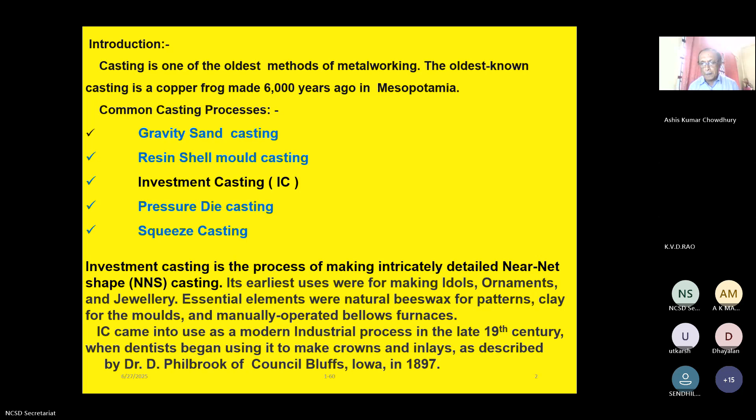During World War II, around 1940, there was increased demand for precision components of specialized alloys that could not be shaped through traditional processes. Industries turned to the investment casting process to manufacture these in large volumes in near net shape form.

Today it is one of the most important technologies for manufacturing components for aerospace, defense, and medical sectors. Industry has already taken up the help of CNC machining, robotics, computer technology, and counter-gravity techniques to achieve the strict acceptance criteria of finished casting components for these sectors.

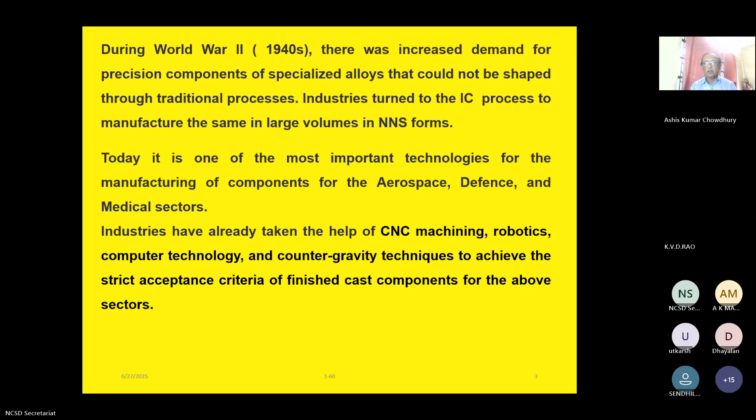Modern industry nowadays demands two main things: high quality, complex geometry engineering components at an affordable price within a reasonable delivery schedule; and number two, in case of new products, the industry should be capable of delivering the prototype component as quickly as possible.

Some of the engineering components being manufactured through the investment casting process for different applications are as follows: orthopedic implants for knee joints, small gears for ordinary machines, triggers for firearms, and turbine blades for aerospace engines.

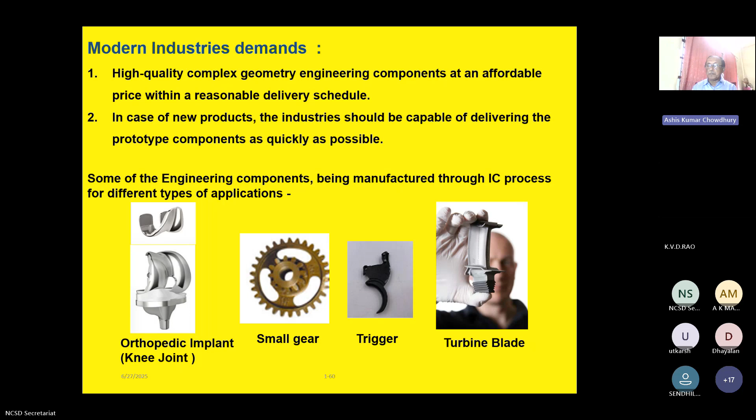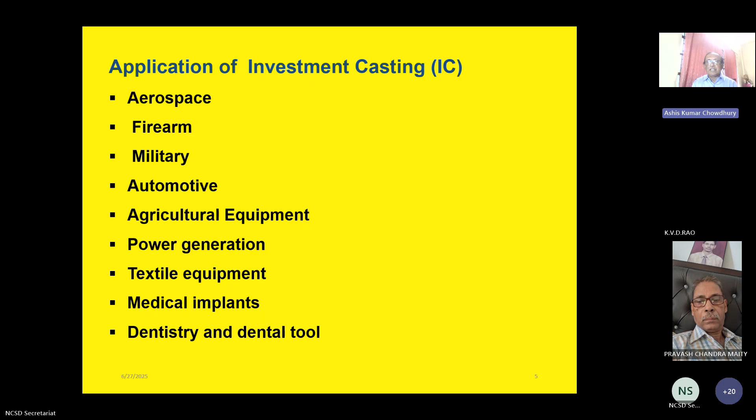There are a lot of advantages of the investment casting process. Some of them are: easy to cast complex geometry components in large volume; number two, provides excellent dimensional accuracy of plus minus 0.05; a wide range of alloys can be processed.

Excellent surface finish, easy to cast thin wall parts, low wastage of raw material, suitable for high melting point alloys as well as difficult to machine alloys. Easy to achieve low level of inclusion content under vacuum melting and casting route, suitable to produce near net shape components.

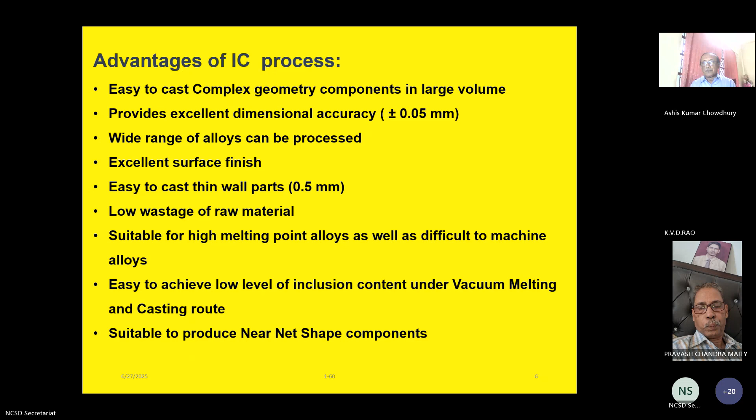Now, when to select this investment casting process? The designer will select it when complex geometry components having tight tolerances, parts are non-symmetrical with fine details, intricate internal passages in design, excellent as-cast surface finish is required, wall thickness is too thin for sand casting.

Machining of internal passages is not possible, alloy is difficult to machine or process through other routes, high upfront tooling cost relative to sand cast are acceptable, or there is high volume of production.

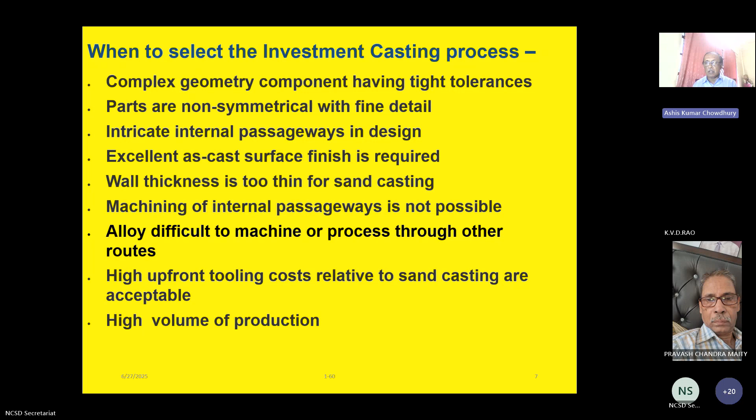The broad outline of investment casting: die making, wax injection, wax assembly to make a tree, followed by slurry coating, followed by stuccoing, repetition of stages 4 and 5 till achieving 6 to 7 layers of thickness, de-waxing to remove the wax, then melting and casting, followed by shell removal, cutting of the component, finishing, and inspection.

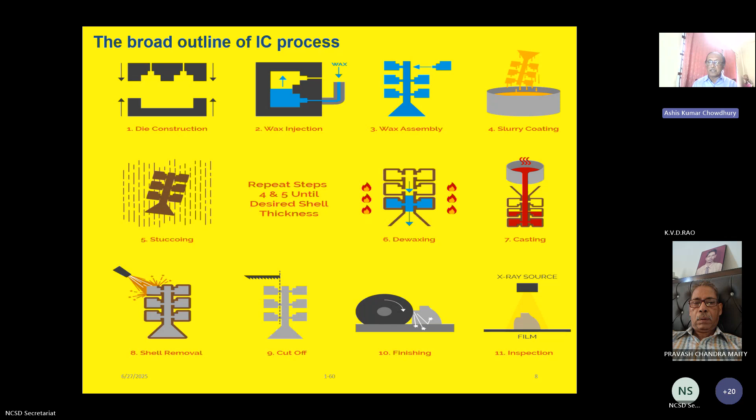Important steps of investment casting are: first, analysis of drawing and development of solid model, simulation of the investment casting process, 3D model of wax pattern and ceramic core, die assembly, manufacturing of die assembly for pattern and core, then wax pattern and ceramic core, assembly of pattern with sprue to form tree, preparation of ceramic shell, dewaxing, drying and sintering of mold, melting of alloy and investment casting of component, fettling of cast component, inspection and testing of cast component, machining and heat treatment of final parts.

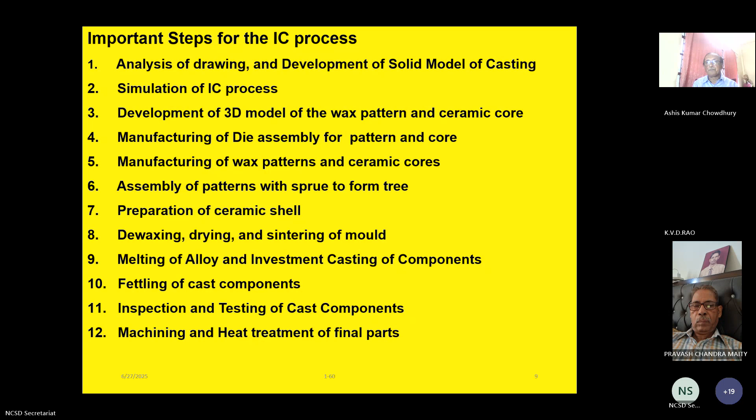Now in detail, I am going through each step of the investment casting process. First, after receiving the drawing and technical specification, the methoding department will analyze alloy specification and melting procedure, whether it is air melting or vacuum melting, dimensional tolerance and dimension, and surface finish. Accordingly, other things will be finalized.

Inspection standard, DT and NDT, and defect acceptance criteria at different zones of the component - that is a very important thing in today's world. Once it has been defined, the next stage is development of a solid model through computer of the as-cast part.

Incorporate the following in the solid model: complex hollow passages of the cast part, shrinkage allowances, and machining allowances wherever applicable. Create the solid model of the as-cast part and the tree assembly.

Initial simulation trial of the solid model using data from the library. The findings show the shape, size, distribution, and location of the defects of the casting.

To eliminate the defects, run more iterations for different cluster assemblies using operating parameters like pouring temperature, mold temperature, pouring time, cooling rate, air cooling or slow cooling, and number of nodes and density of the casting. One thing to always keep in mind: the number of nodes is very crucial to run this simulation. If the number of nodes is more, your computer time will be more. On the other hand, if the number of nodes is more, you will be able to detect very fine defects.

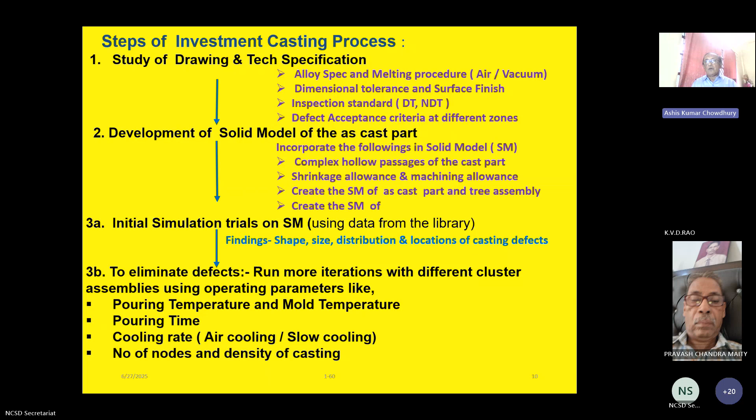Now I'll show you two diagrams of simulations. One is on the left-hand side, where there are small components assembled in a cluster on a tree. In the first row it's 4, second is 3, and last one is 2. It is showing the solidification sequence of the component with respect to the main reservoir of the pouring basin.

The red color shows liquid metal temperature. Green and blue show the solidification sequence. On the right-hand side is the assembly of turbine blades, stator turbine blades of a jet engine, with assembly on a single sprue supplied by two runners, one on top and another on the bottom. It is also showing the sequence of solidification.

After the solidification time is over, the methoding department should carry out the slicing operation to check whether any defect is there or not, and if so, what is the size and location. Then, in order to eliminate it, they have to run the simulation trial a number of times. Generally, to achieve the target, it takes 7 to 10 days to overcome these defects.

The outcome of the computerized simulation is the final geometry of the quality casting, geometry of the pattern, runner, ingate and their position, mold temperature, pouring temperature, pouring time, solidification time, and cooling characteristics.

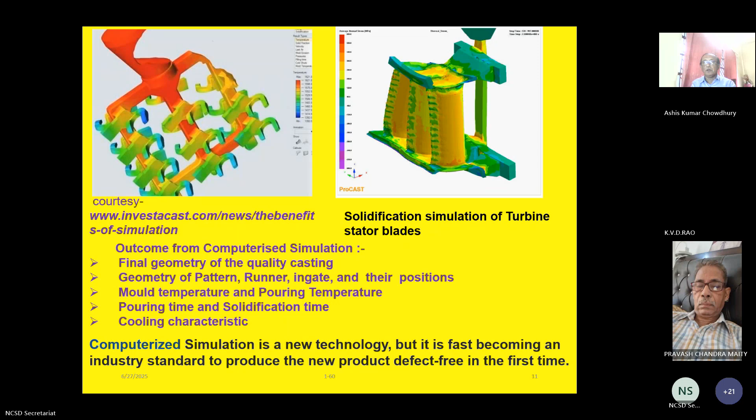Next is manufacturing of the die. Die for wax pattern — the solid model of the pattern will give you the data. One way we can manufacture it is through conventional machining or CNC machining. Otherwise, if it is a new product, we can go through an RP model component and then a silicon rubber mold for manufacturing a limited number of patterns, the RP patterns.

Type B is the die for manufacturing of the core. The contour of the hollow passages of the cast component is digitized from the solid model, transferred to the CNC machine, and then the metallic die is manufactured through the CNC machine. Templates and gauges are used for periodic inspection of the die contour.

The materials used for manufacturing the die assembly for pattern and ceramic core include steel, aluminum, beryllium-copper, rubber, and plastic. Soft metal tooling and non-metallic tooling like RP are primarily used for prototype development.

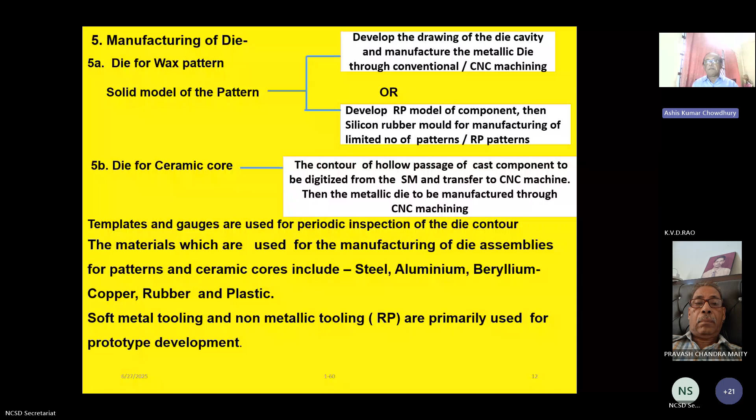After manufacturing of the die, you have to do the inspection. The die assembly has to be inspected for dimensional accuracy and profile by CMM. All working surfaces of the die cavity should be highlighted and highly polished.

Desired surface finish is to be achieved by polishing and lapping. Sharp corners are to be eliminated for easy ejection of the pattern and cores.

Trial runs are carried out with the die assembly to assess its performance for manufacturing the wax pattern and ceramic core, if necessary, before initiating final production. During regular production, periodic inspection of the die cavity has to be carried out with different types of tools and gauges.

Manufacturing of pattern.

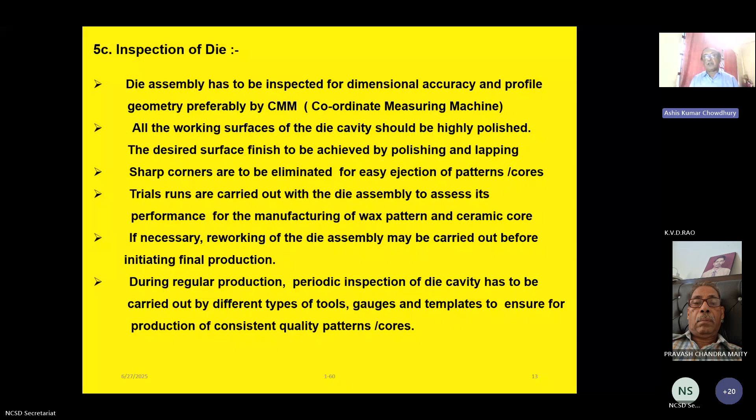Complicated shapes with close tolerance and intricate core configuration demand the use of specific type of pattern material that should have the ability to reproduce fine details as well as be easily removed from the ceramic shell. Waxes are mostly the preferred material for patterns and are normally used modified, blended with additive materials in order to improve their properties.

The following waxes are most used: paraffin wax, having a melting point of 52 to 68, and microcrystalline wax, having a melting point of 63 to 93. Paraffin wax has low cost, high lubricity, and low viscosity. Microcrystalline wax, both hard, non-tacky grades as well as soft grades, tends to be highly plastic and provides toughness to the wax blend. Paraffin and microcrystalline wax are the most widely used waxes and are often used in combination because their properties tend to be complementary.

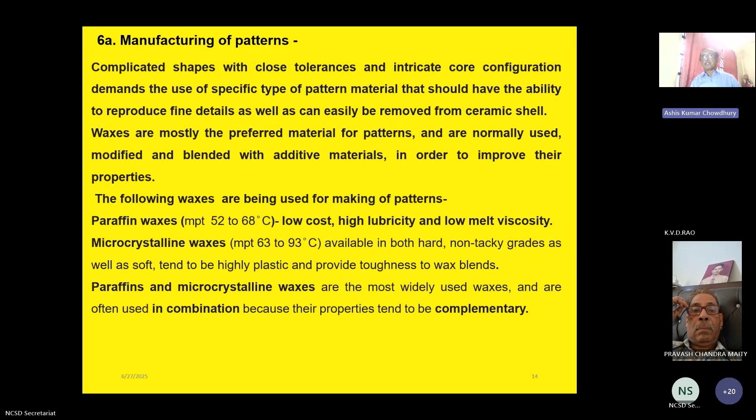The tank of an injection press holds the liquid wax and is constantly agitated to ensure a homogeneous mixture. A hydraulic cylinder moves the liquid wax into the injection cylinder to prepare for injection. Once the die is closed, another hydraulic cylinder pushes the wax through the heated hose and into the die via the injection sprue, filling the cavity and allowing the wax to solidify inside. Once solidified, the wax patterns are removed from the tool.

Process parameters for making patterns: wax temperature, nozzle temperature, injection pressure, flow rate, and dwell time.

A gate is left in the pattern which serves as the connection point for the wax runner in the next step of the process. At this point, wax patterns are now ready to move for assembly with the sprue. Wax has a low melting point and low viscosity, which makes it easy to blend, inject, assemble into a cluster, and melt out without cracking the thin ceramic shell mold.

Other pattern materials are plastic. A general purpose grade of polystyrene is usually used for production of components in large volume.

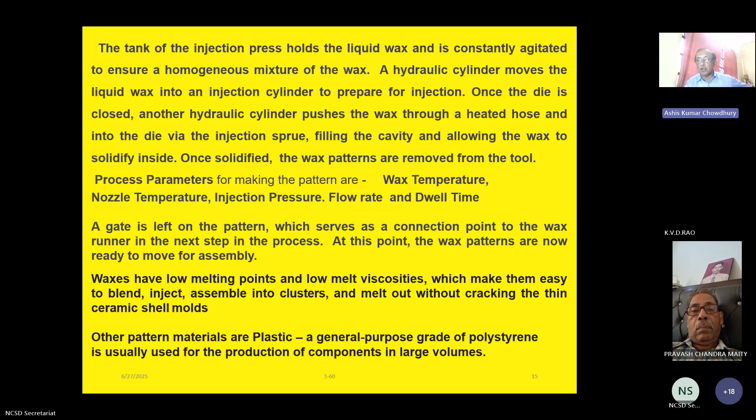Points to be considered for selecting a pattern material: strength, fluidity, low ash content, compatibility with ceramic shell and core, dimensional stability with minimum dimensional distortion during storage as well as during preparation of the ceramic mold, shelf life with longer storage life, and miscellaneous factors such as initial cost and availability.

Pattern through RP. This is another way of making it. Advanced techniques have been developed currently to produce prototypes when only a few patterns are required.

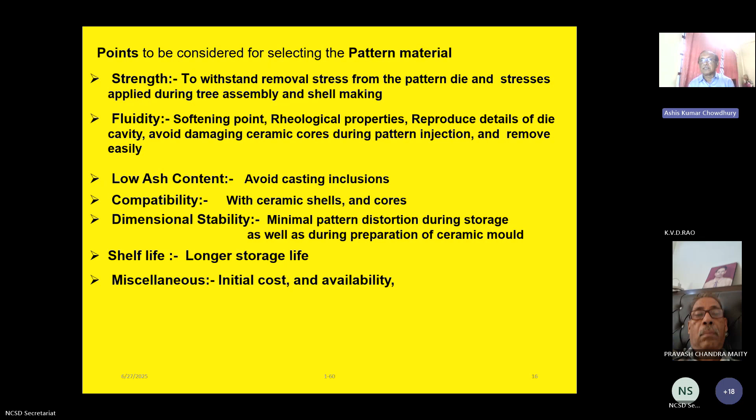For such limited use of patterns, rapid prototype patterns are being produced in machines utilizing advanced techniques such as SLS, selective laser sintering, and SLA, stereolithography, with the help of special polymers called photopolymers. These techniques are also known as...

3D printing produces prototype patterns by building parts through depositing fine layers of various materials, using laser only when necessary to achieve the finished shape as defined by CAD. These patterns have been found to have a favorable dewaxing response, resulting in substantially improved surface quality for investment casting prototypes in many alloys. Prototype ceramic cores are also being manufactured through the RP route from 3D solid models.

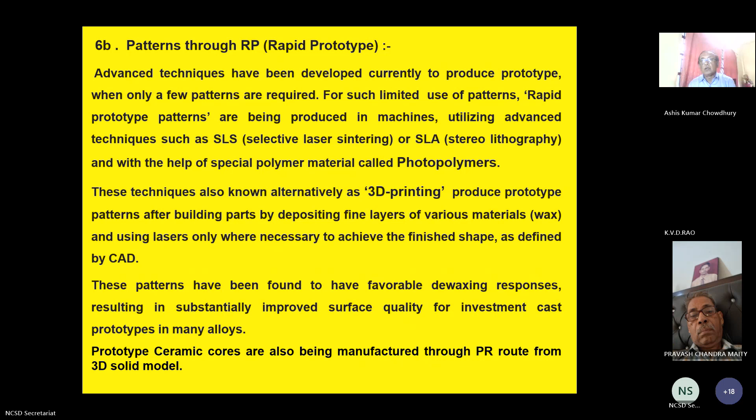Manufacturing of ceramic core. Ceramic cores are widely used in investment casting to produce intricate internal passages in the casting. Ceramic cores must have the following characteristics: enough strength to withstand the forces of wax injection, excellent thermal shock resistance to withstand thermal stresses, high refractoriness value to retain geometry during the entire process, chemical compatibility with the cast alloy, and easy removability from the casting.

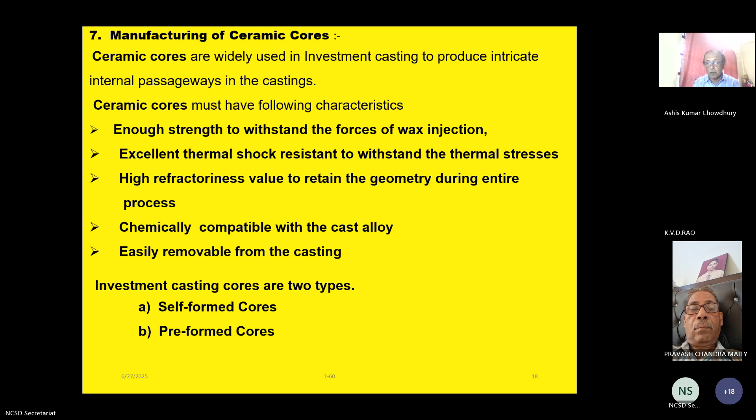Investment casting cores are of two types: self-formed cores and pre-formed cores. Self-formed cores require that the wax pattern already have a clear opening corresponding to the passageway desired for casting. For simple shapes, this is achieved by using metal inserts or pull cores in the pattern tooling before injecting the pattern material.

The first example is a wax pattern with a self-formed core, and the second is a cluster produced from the same pattern, as shown. For complex geometry where pulling of an insert is difficult, soluble cores are placed in the tooling, and then wax is injected to make the desired pattern.

Soluble cores are generally made from solid polyethylene glycol with a powdered filler such as sodium bicarbonate or calcium carbonate. The filler can be dissolved in an aqueous solution, such as citric acid, with vigorous gas evolution providing the agitation to speed up the dissolution process.

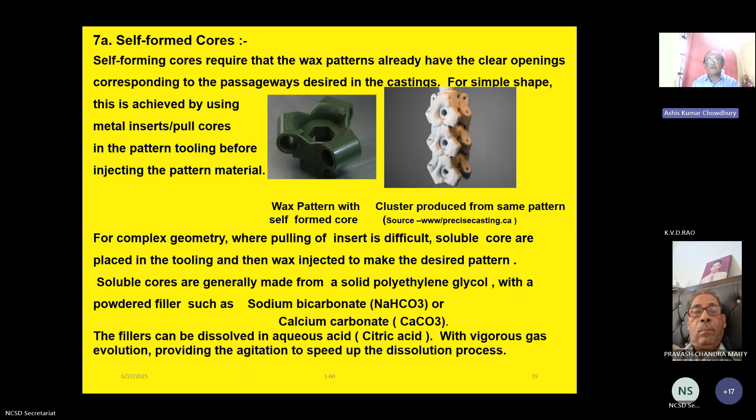The second one is preformed cores. Preformed cores are required when self-formed cores cannot be used. Simple tubes or rods are commonly extruded from silica glass. Many cores are made by injection molding of fine ceramic powder, fused silica, and sometimes with addition of zircon, with a suitable organic binder like thermoplastic material such as polyethylene or ethyl cellulose, into a steel die, subjecting the cores to two stages of heat treatment. In the first stage, the thermoplastic binder is slowly removed from the cores without disturbing the core geometry. This is a very crucial technique. In the second stage, the core is sintered at high temperature to achieve its final strength and dimension.

Preformed cores are normally used by placing the pattern die and injecting wax around them. Since core expands differently than shell mold due to their difference in composition, core must be provided with slip joint in the mold. Dimension of core print and dimension of seat should perfectly match, leaving no gap in between. Displacement or breakage of the core has to be prevented during injection of pattern as well as during casting process, otherwise casting will be defective. In order to ascertain the dimension, it is easy to measure the gap between the wall of the core and die cavity with the help of a template or gauge. This has to be performed after placement of core inside the die cavity.

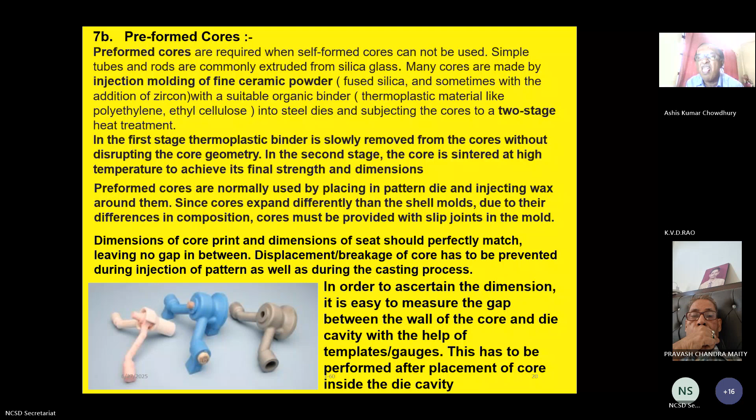Cleaning of pattern: current foundry practices for cleaning and etching wax pattern for removal of silicone oil or any other releasing agent before the primary ceramic coat is applied includes use of citrus-based solvent, detergent emulsion, or a mixture of both. Otherwise, if we are not removing the greases and silicone oil, it will be difficult to carry out the shell making. Pattern washes of this type have replaced The dangerous low flash point solvents which were earlier used, like spirit, acetone, toluene, xylene, have been replaced by current formulations of water-based solutions, which are dilutable, with deionized water, and recyclable.

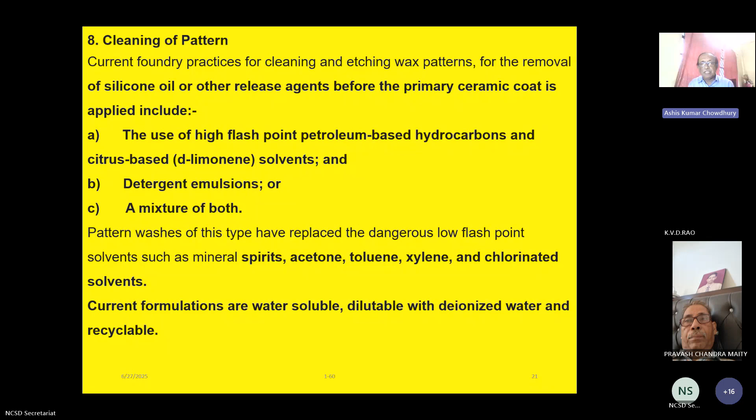These are more useful and easy to operate. After washing or blowing off, often with air, the solvent is left to evaporate clear. The effectiveness of the cleanliness of the pattern surface has to be inspected by carrying out a test: dip a clean wax bar or pattern into primary binder slurry to its midpoint, remove the binder and observe the surface. Good wetting indicators would be uniform coating with no slurry break. Poor wetting indicators include slurry breaks and forms holes.

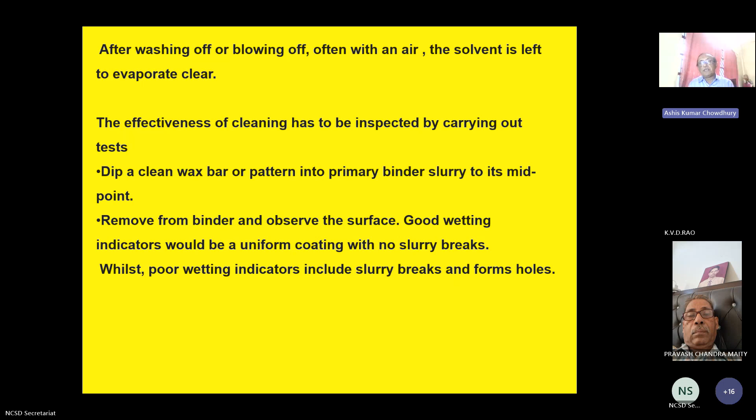Now next is runner design. Runners distribute the liquid metal to optimize the metal supply mechanism. It guides the liquid flow to fill the targeted product cavity. Also, it allows multiple metal delivery channels, which enables a mold to hold multiple product cavities. This adds economical value to foundry practices. Adding more parallel runners can also help facilitate better metal filling in complex or heavy parts. Size of runner also influences the feeding rate into the ingate, which later relates to the feeding rate into the product cavity.

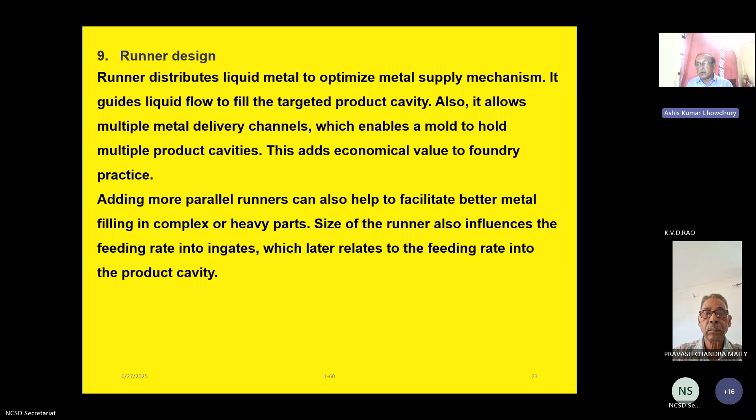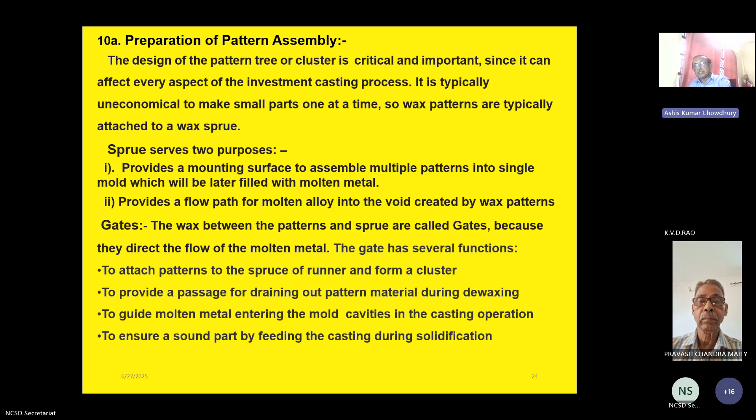Here I have given the photograph of two examples. This is a typical small component. The first one is the solid model of a small component. The next figure is the solid model of the component with ingate, shown in red color. In the next photograph, all these components - 12 components, left hand side 6, right hand side 6 - are shown with a central sprue, and at the top of it is a pouring cup. The bottom is feeder extension; this is the height of the feeder. The right hand, extreme right, indicates the location of the runner.

The entire cluster has 36 parts. Since this is small, this system can take 36 parts in one time for one casting. So this has to be decided by experience, how many parts have to be assembled in the tree. If the height of the feeder is more, then two factors come into picture: one is the weight of the entire system will be very high, including the weight of the shell mold.

If the height is increasing, there is a tendency of turbulence at the bottom of the mold. This is not desirable because it will erode the shell layer, so there has to be an optimized design factor.

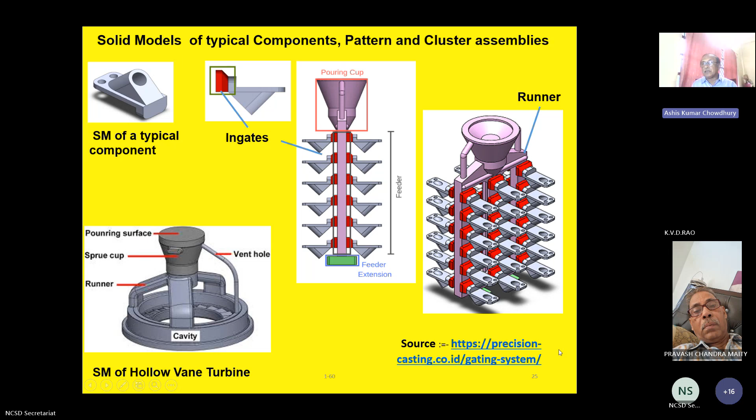Large patterns are set up and processed individually, but small and medium ones are assembled into a multiple pattern cluster for economy of processing. Most patterns are injected complete, including the ingate. However, complex parts can be injected in segments which are assembled into final form.

Gating components, including pour cups, are produced separately. Patterns and gating components are assembled to produce the pattern cluster. Preformed ceramic cups are often used in place of wax ones. Assembly of all parts is done manually.

Wax components are assembled by wax welding using a hot iron or spatula or small gas flame. Wax at the interface is quickly melted and components are pressed together until the wax solidifies. Joints are smoothed over; subsequently, the radius of the corner has to be filled up with wax.

Patterns must be properly spaced and aligned. Joints must be strong and completely sealed with no undercut.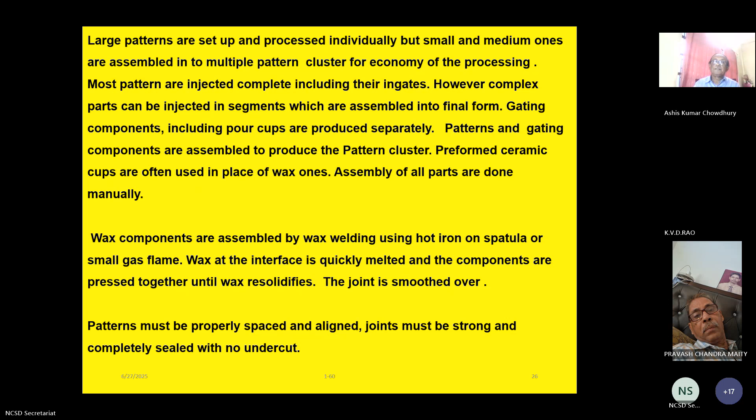Polystyrene patterns can be assembled by welding, using a solvent such as methyl ethyl ketone. The plastic at the interface is softened by the solvent and parts are pressed together until bonded. Assembly of polystyrene to wax is done by welding with only the wax being melted.

Cluster design: factors to be considered for designing of pattern cluster are ease of assembly, number of pieces to be assembled, handling strength, ease of mold form and drying, flow of liquid metal, feeding of shrinkage, fettling, and available infrastructure. The size of the furnace is also a big factor.

Three requirements are essential: providing a cluster that is properly sized and strong enough to be handled throughout the process, meeting the metallurgical requirement of the component, and casting of separate test specimens for chemical and mechanical tests. Once these essentials are satisfied, other factors are adjusted to maximize profitability.

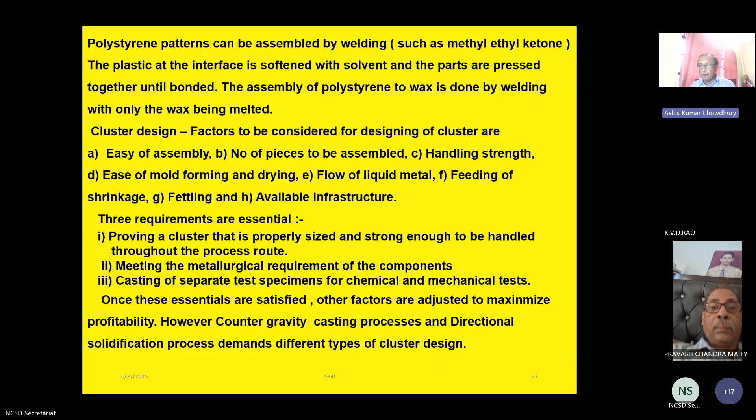However, countergravity casting process and directional solidification process demand different types of cluster design.

Pouring cup: it collects the poured liquid metal and facilitates metal flow into the mold. It is the liquid metal entrance into the mold. In investment casting, it also acts as a reservoir to supply extra metal if required.

Proper gating system design can also trap slag, dross, and inclusions from entering the product cavity. Light inclusions float to the pouring cup given enough time due to lower density compared to liquid metal. They may be present in the melt or form during pouring. Reoxidation is the most frequent origin of inclusion. Some inclusions can also originate from melting and casting equipment, from the furnace and ladle, even from mold debris. This has to be carefully handled.

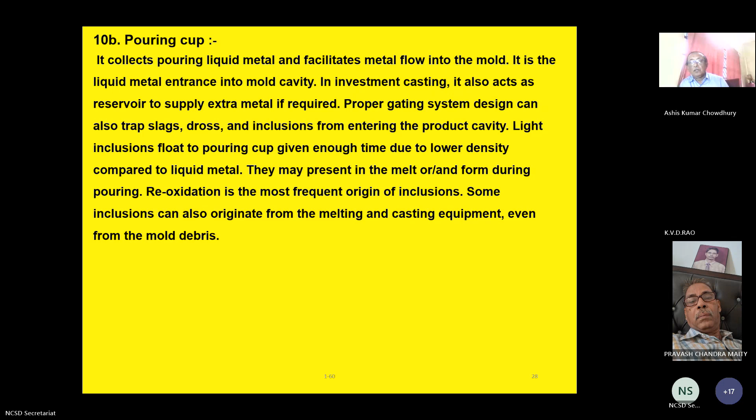Ceramic shell molds are made by applying a series of ceramic coatings on the pattern cluster. Each ceramic shell consists of 7 to 10 layers of ceramic particle layer. The most common refractory materials used for ceramic shell molds are silica, zircon, and various aluminum silicates, composed of mullite and free silica. Alumina is used for production of superalloy castings.

Silica is used in the form of silica glass. Its extremely low coefficient of thermal expansion imparts thermal shock resistance to the mold, and it is readily soluble in molten caustic soda. The caustic solution provides a means of removing shell material chemically from inaccessible areas of the casting that are difficult to clean by other methods.

Zircon occurs naturally as sand and is used in the form of stucco. It is generally limited in use; it does not occur in the higher sizes required for the backup coat. It is sometimes used with silica and/or aluminum silicate. Its advantages are high refractoriness, resistance to wetting by molten metal, round particle shape, and availability. That is why the first coat of the shell is made by zircon powder.

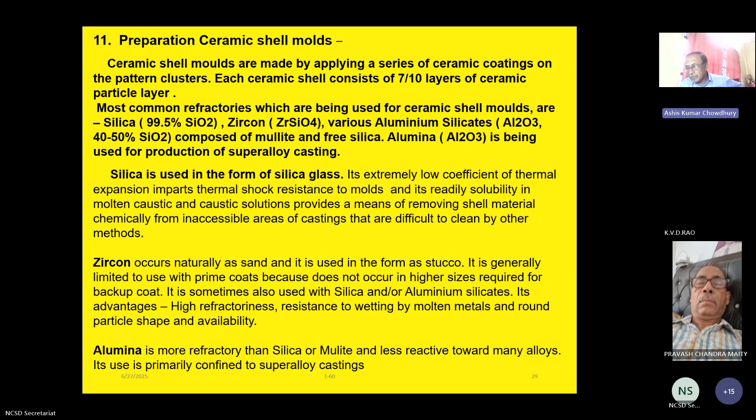Selection of shell material is dependent on a number of parameters such as type of alloy, temperature of pouring, casting process, and availability and cost. Some typical refractory materials and their maximum use temperature are: alumina can be used up to 1840 degrees centigrade, silica 1680 degrees centigrade, zircon up to 1650 degrees centigrade, aluminosilicate 1560 degrees centigrade.

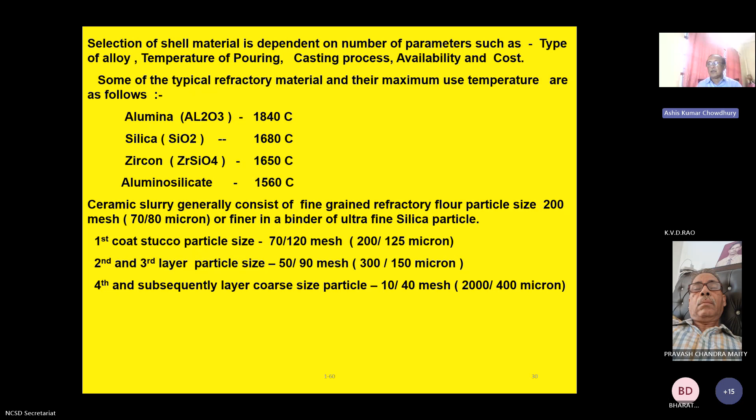Ceramic slurry generally consists of fine-grained refractory flour, particle size 200 mesh, that means 70 to 80 micron, or finer, in a binder of ultra-fine silica particles. The first particle layer is 70 to 120 mesh, 125 to 200 micron. The second and third layers are 50 to 90 mesh. The fourth and subsequent layers have a particle size of 10 to 40 mesh.

Slurry is prepared by adding refractory powder to the binder liquid, using agitation to break agglomeration, remove any air entrainment, and continued stirring is also required in production to keep the powder from settling out of the suspension. Either a rotating tank with baffles or a propeller mixer is used for this purpose.

Control procedures for slurry vary considerably among foundries. The most prevalent controls are measurement of initial ingredients, slurry temperature, density, pH, and viscosity. Viscosity is measured with a number 4 Zahn cup or number 5 Zahn cup.

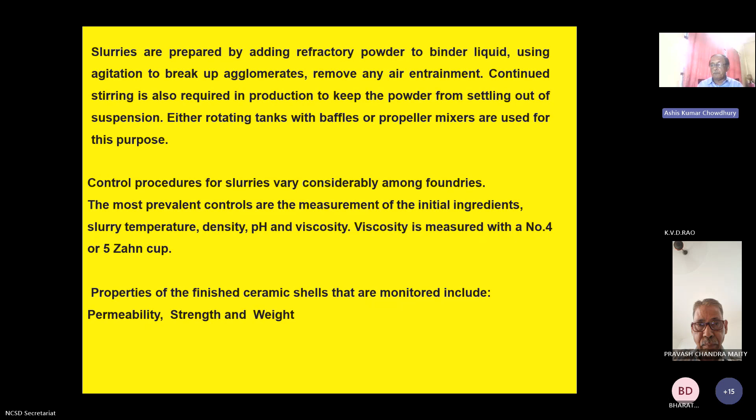Properties of the finished ceramic shell that are monitored include permeability, strength, and weight. These three are very important parameters for the ceramic shell.

Role of binder: stability and rheology of ceramic slurry, green strength of the shell, high temperature strength of the shell. Normal slurry contains colloidal silica or ethyl silicate as a primary binder.

Both provide an extremely small particle size that is evenly distributed around the ceramic aggregates. Silica particle size ranges from 70 to 80 nanometers. This silica particle size of 70 to 80 nanometers is a very important thing for binding.

Small particles provide a very large surface area, which because of its high reactivity produces excellent bond in both the green state and fired state. Small amounts of organic material are also added to the binder in the slurry to improve pattern wetting, reduce foaming, and increase green strength.

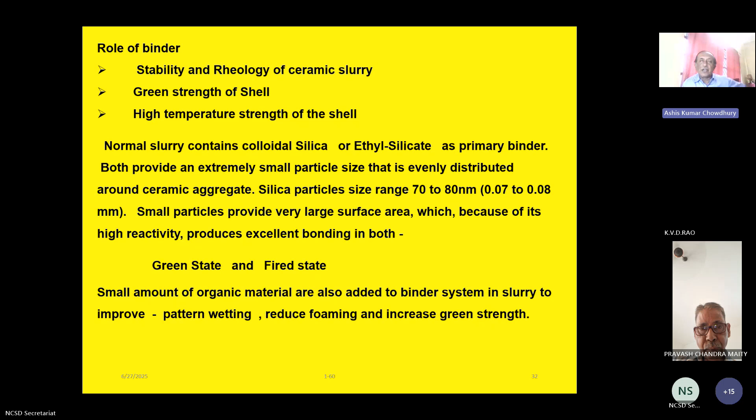Typical composition of zircon slurry, which is used as the first coat material, basically it will always be there for binding: colloidal silica 9.5 liters, water 3.4 liters, zircon powder 45 kg. Density should be around 2.7 grams per cc, viscosity 8 to 10 on a number 4 cup.

Slurry is prepared by adding refractory powder to the binder liquid using agitation to break agglomeration and remove any air entrainment. Stirring is continued until viscosity falls to its final level before the slurry is put to use.

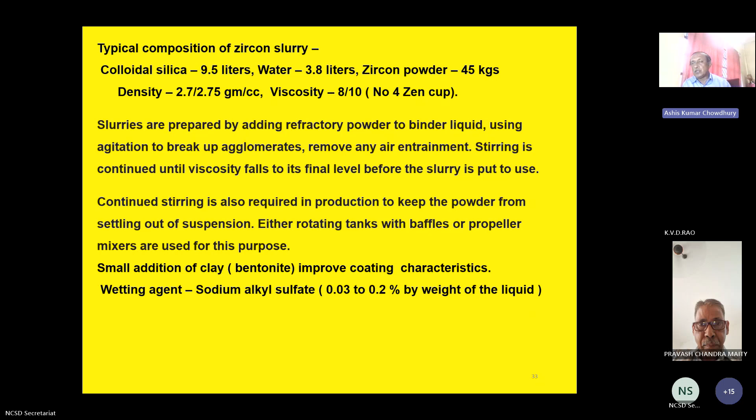Continued stirring is also required in production to keep the powder from settling out of suspension. Either a rotating tank with baffles or a propeller mixer is used for this purpose. A small addition of clay or bentonite, in very small amounts, improves coating characteristics. A wetting agent, sodium alkyl sulfate, at 0.03 to 0.2% weight of the liquid, may be added.

Hybrid binder: colloidal silica and ethyl silicate can be added together to produce better binding. Water required for hydrolysis of ethyl silicate is supported by using colloidal silica, providing an additional source of silica particles for improving the strength.

Composition of slurry, which is usually proprietary, is based on the particular refractory powder and type of binder. Slurry composition is generally in the following range: binder solid 5 to 10%, liquid from binder added 15 to 30%, and refractory powder 60 to 80%.

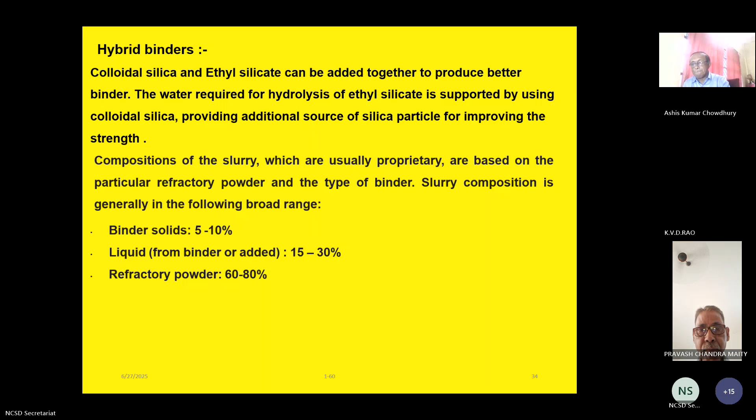The pattern cluster is first dipped into the ceramic slurry bath, then the cluster is withdrawn from the slurry and allowed to drain out the excess slurry. To produce a uniform coating of slurry on the entire assembly surface, the wet layer is immediately stuccoed with a different grade of ceramic particle, either by sprinkling the particle or by immersing it in a fluidized bed of ceramic particles.

First layer: fine ceramic powder, that is zircon powder, is uniformly sprinkled over the entire surface of the tree assembly. After drying, additional coarse ceramic particles are gradually embedded layer by layer over the cluster assembly. After each layer, the assembly is dipped in the ceramic slurry bath and then sprinkled with coarse ceramic particles. A total of 7 to 10 layers of ceramic particles are added to form the total shell.

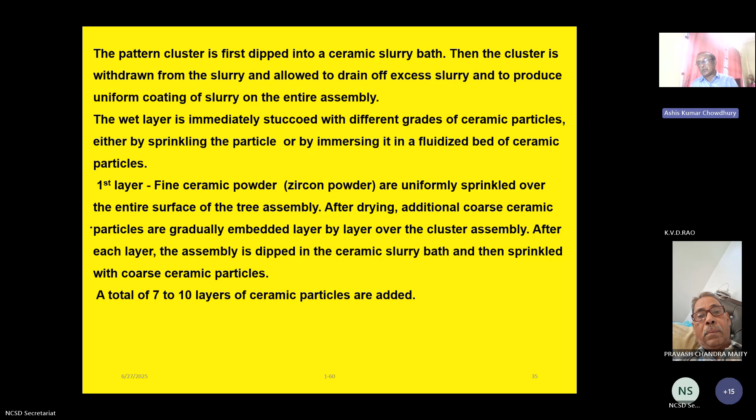This thickness depends upon the weight of the component, particularly, and the density of the material. These are the two factors that have to be decided. Handling strength is one of the factors.

Rate and uniformity are important parameters in drying the ceramic molds.

These factors are very critical since variation during drying can cause the pattern to distort, leading to improper function of the ceramic layer. This drying is a very slow process. In order to maintain uniformity, the environment has to be always stable. It is desirable to use a drying cabinet to maintain stability despite the cooling associated with the evaporation of water. This can actually crack the coating.

Therefore, to prevent this, relative humidity is normally kept between 40 to 50%. Between coats, slurries are hardened by drying or gelling. The number of coats required is related to the size of the cluster and to the metal weight to be poured. It may range from 5 for small clusters to 12 or more for larger ones. For most applications, the number varies between 6 to 9.

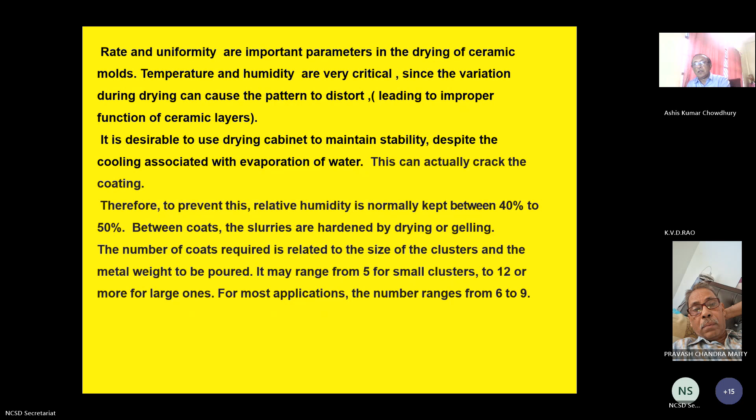Pattern removal, or dewaxing, from the ceramic mold is the operation that subjects the shell mold to the most stress, since thermal expansion of the wax is many times that of the refractory used in the mold. When the mold is heated to liquefy the wax, the expansion differential leads to enormous pressure capable of cracking the mold. In practice, to minimize the stress due to expansion of wax, heating of the mold is carried out extremely rapidly from the outside. This causes the surface layer of the wax to melt out very quickly before the rest of the pattern can heat up appreciably.

This molten wax layer either melts out of the mold or soaks into it, thus providing space to accommodate the expansion of the wax as the remaining wax is heated. Before dewaxing, ceramic shells are subjected to 16 to 48 hours of extended drying after the last coat for complete removal of moisture and to achieve the full strength needed to withstand the stresses.

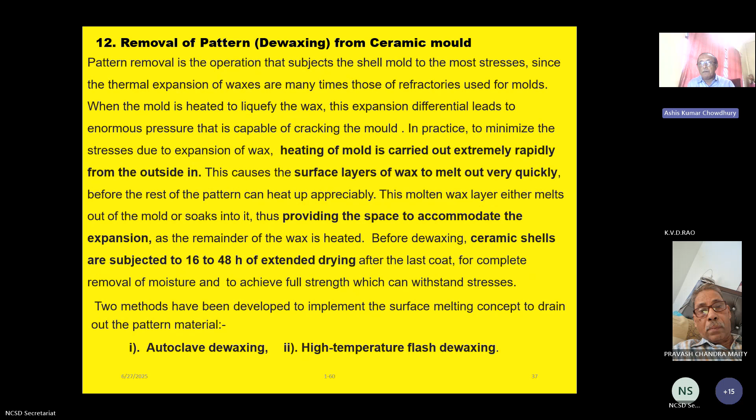Two methods have been developed to implement the surface melting concept to drain out the pattern material: autoclave dewaxing and high temperature flash dewaxing. Autoclave dewaxing, the most widely used method, uses saturated steam jacketed vessels with steam accumulator to ensure rapid pressurization. Autoclaves are equipped with a sliding tray to accommodate a number of molds, a fast-acting door with a safety lock, and an automated wax drain valve. Operating pressure is 550 to 620 kPa, or 80 to 90 psi, reached within 4 to 7 seconds. The molds are dewaxed in approximately 15 minutes or less.

High temperature flash dewaxing is followed for removal and burning of polystyrene pattern material. Autoclave removes the majority of the wax, which can be reconditioned and reused. Flash fire burns off residual wax and cures the shell, readying it for casting.

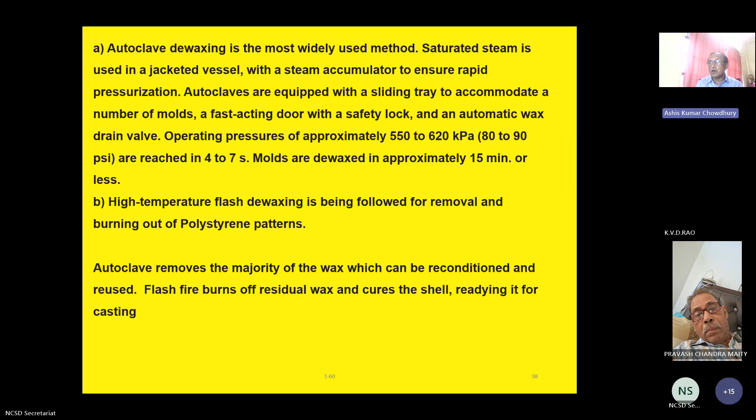Mold firing and burnout: ceramic shell materials are fired to remove moisture, burn off residual pattern material and any organics used in the slurry material, to sinter the ceramic, and to preheat the mold to the temperature required for casting. In some cases, these are accomplished in a single firing. Other times, preheating is performed in a second heat.

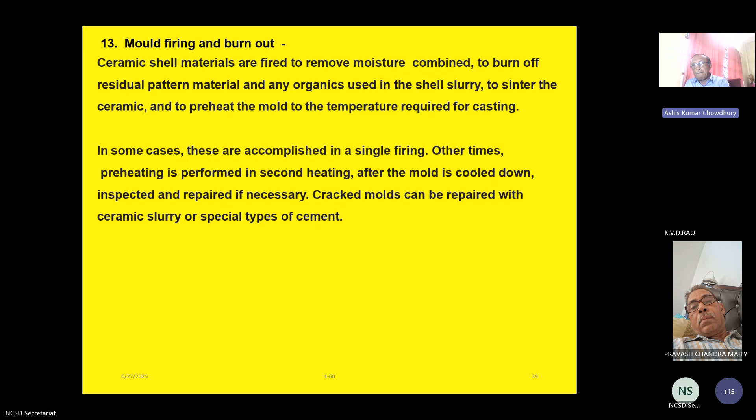After the mold is cooled down, it is inspected and repaired if necessary. Cracked molds can be repaired with ceramic slurry or a special type of cement. Sometimes molds are wrapped with ceramic fiber blanket for slow cooling, or placed in an insulating box to minimize the loss of temperature that occurs between the preheat furnace and the casting operation, to ensure better feeding of molten metal into thin sections of the mold.

Preheat temperature varies depending on the part configuration and alloy to be cast. Aluminium preheating requirement is 150 to 650°C. Copper base is 425 to 870°C. Steel and superalloy between 850 to 1050°C.

It is essential to measure the temperature profile inside the furnace where the shell will be heated, and this has to be measured regularly. Variation of temperature across the hearth of the furnace should be within ±5. The rate of heating should be very slow to minimize thermal shock and thermal stress on the ceramic shell.

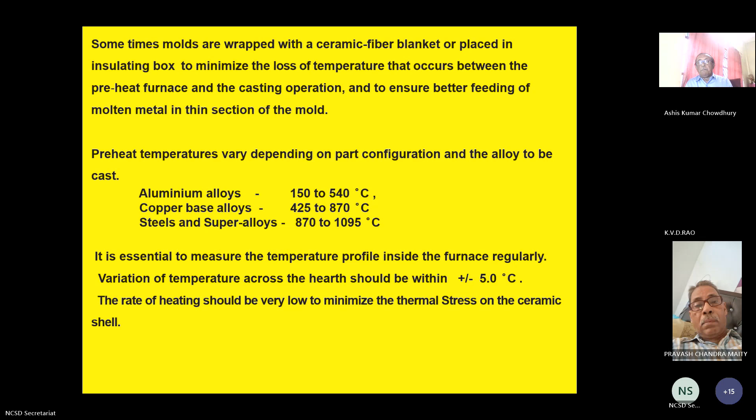Melting and casting: investment casting units operate induction melting furnaces to process various types of alloy. Most induction furnaces for investment casting have a capacity ranging from 25 kg to 250 kg. Induction furnaces can be employed for melting in air, vacuum, or inert atmosphere. They are extensively used for melting steel, iron, cobalt, nickel alloy, and sometimes copper and aluminum alloy. Crucibles typically used are magnesia, alumina, or zirconia.

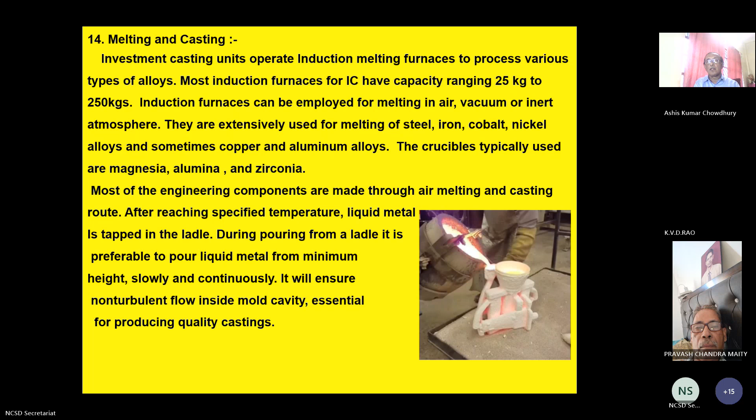Vacuum melting and casting provides a cleaner metal and offers superior mechanical properties. Its major use is for special type of alloys, like nickel-based alloy, cobalt-based alloy, and titanium.

A major advantage of investment casting is its ability to cast very thin wall castings due to use of hot mold. This advantage is further enhanced by specific casting methods such as vacuum assist casting, pressurized casting, and counter-gravity casting. There are 4 types of counter-gravity casting process known by the acronyms CLA, CLV, CV, CLAS.

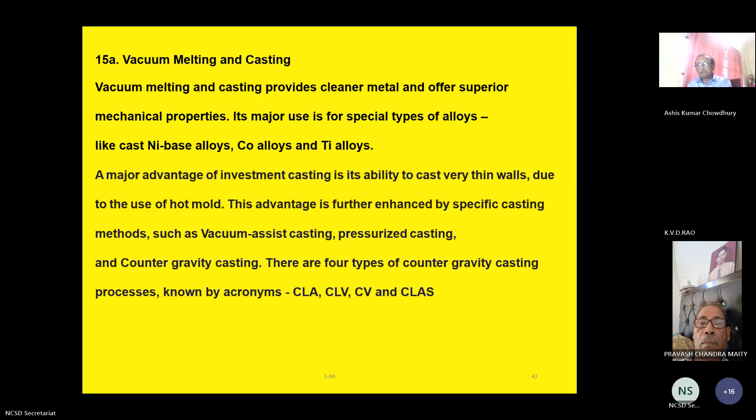This is another technology extension of investment casting technology. In order to meet the stringent acceptance criteria of jet engine components like turbine blades, Hitchner Inc, US developed counter-gravity casting during 1975 to 80. Counter-gravity low pressure casting of air melted alloys is popularly known as CLA.

CLA has a preheated ceramic mold with an extended sprue placed in a chamber above the melt of an air melted alloy. The sprue is lowered to below the melt surface.

Vacuum is applied to the mold chamber to cause controlled filling, anti-gravity filling basically, of the mold cavities. Vacuum is released after the casting and the ingates solidify, causing the molten metal in the central sprue to return to the crucible of the furnace for the next cycle.

Advantages of this process are low inclusion level, higher yield, easy to cast thin sections, easy to remove parts during fettling. Another process name is CLV, counter-gravity low pressure casting of vacuum melted alloys. Here the melting should be done in vacuum.

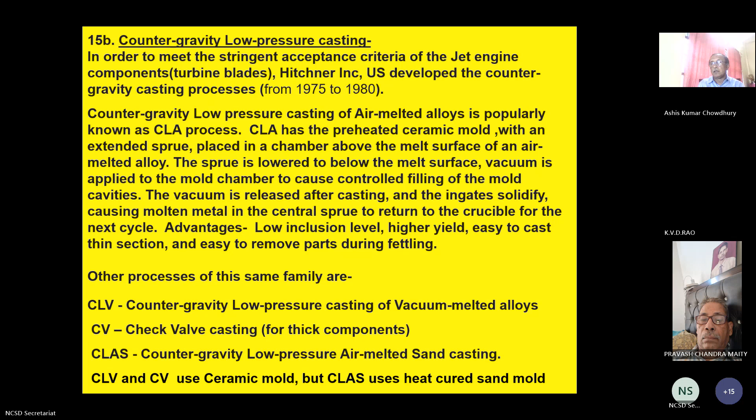Liquid will be drawn from the central portion of the melt, so you will always get very clean liquid. Since there is control of suction, you can control the flow according to the application of pressure rate and suction rate. Therefore, turbulence is totally eliminated.

Once the chamber is totally filled up, the in-gate system will solidify and pressure is released, and the central sprue will go down. The liquid from the central sprue will go back to the furnace. Then the component will go, the box will go up.

Here, the main critical things are in-gate geometry design and box rotation. So this is a very unique process and is being used till today in USA. Extension of this process is CLV.

Here, melting is done in vacuum, and once vacuum melting is over, it goes up and the box comes down and suction takes place. The casting is over, the melting furnace will come down and the box will go up. This is mainly suitable for reactive alloys like nickel-based alloy and titanium-based alloy for aerospace components and medical implants.

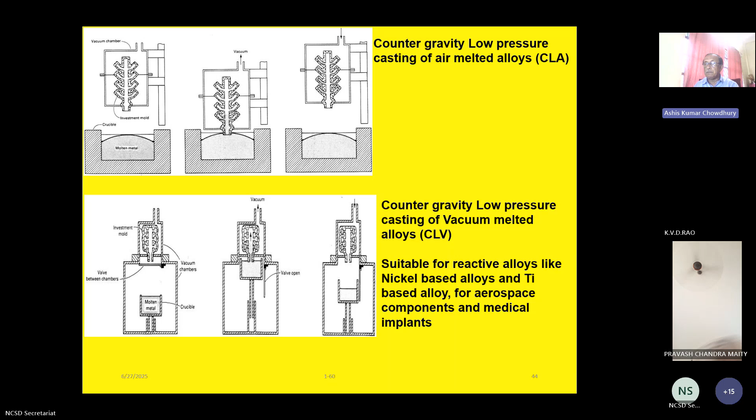Advantage of counter-gravity casting process: yield is 70 to 90%. It is not possible in normal investment casting, but in CLV it is possible. Non-turbulent flow of liquid metals, far less slag and non-metallic inclusion, 80% less than conventional gravity casting. It is really a significant output.

Ability to cast thin sections easily, superior quality and low rejection rate. Since defects are very low, inclusions are also low, so you automatically and consistently get higher mechanical properties, suitable for both ferrous and non-ferrous alloys.

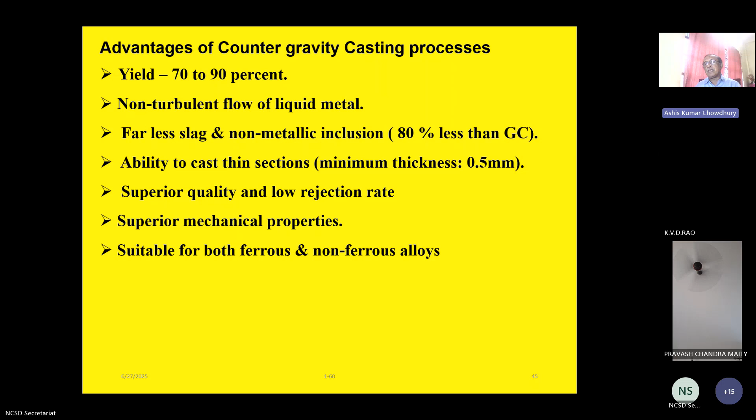Now, another development has taken place in the last 20 years. Metal parts with complex geometry, when we are not able to produce them by conventional die wax injection method because the fins are very thin and cannot be ejected out from the die, then 3D printing machines have come into picture.

3D wax printing machines can deliver complex geometry wax patterns for the creation of intricate metal parts through the investment casting route. Specialized wax materials are available for 3D printing that are designed for clean burnout and compatibility with different metal alloys.

This process eliminates the need for traditional tooling dependent pattern making, making it suitable for prototyping, spare parts, and short production runs. Advantages at the initial level include design flexibility when a new product is being designed, high accuracy, high surface finish, rapid prototyping, and cost and time saving.

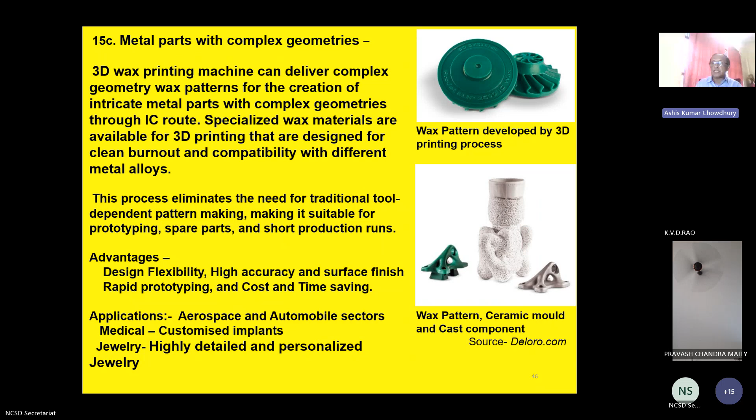Post-casting operations represent a significant portion, often 40 to 50% of the cost of producing investment castings. A standard shop routine is provided for each, and large savings can be realized by specifying the most cost-saving route.

Knockout: shell material is knocked out with a vibrating hammer or by hand. The remaining portion of the shell and the layer of prime coating adhered to the casting surface are removed by shot blasting.

Fettling: aluminum, magnesium, and copper alloy are cut off by saw, while harder alloys are removed from the ingate with the help of an abrasive wheel. Following cut-off, the gates are ground flush and smooth using the abrasive wheel.

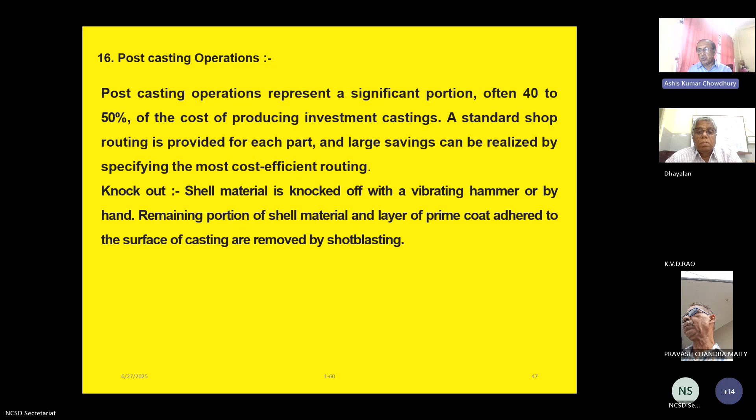Core removal: cores can be removed by abrasive or water blasting. If water blasting is not possible, the core can be dissolved. This can be accomplished using molten caustic soda or a boiling solution with 20 to 30% sodium hydroxide, or potassium hydroxide in an open pot.

Heat treatment operations are carried out as per the standard cycle applicable for the component. Subsequent blasting is also carried out to remove scale resulting from core removal and heat treatment. Then components are released for final machining.

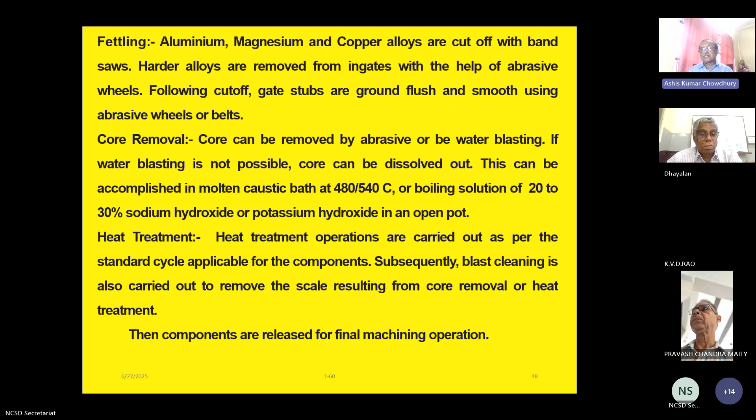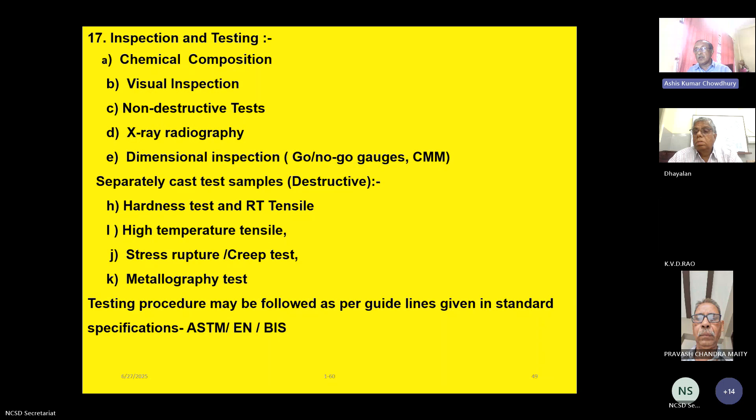Inspection and testing as per requirement can be done: chemical composition, visual inspection, NDT, X-ray, dimensional inspection, and DT, hardness, tensile, stress and rupture, and metallography as per international standards. Guidelines for production of high-quality investment castings are to be followed.

Carry out simulation with a wide range of options and parameters and select the best one. This will minimize the chances of rejection. Implement the outcome of the simulation to the extent possible.

All raw materials are to be procured as per specification from reputed vendors. Wax patterns with surface defects or distortion should not be cleared for the next operation.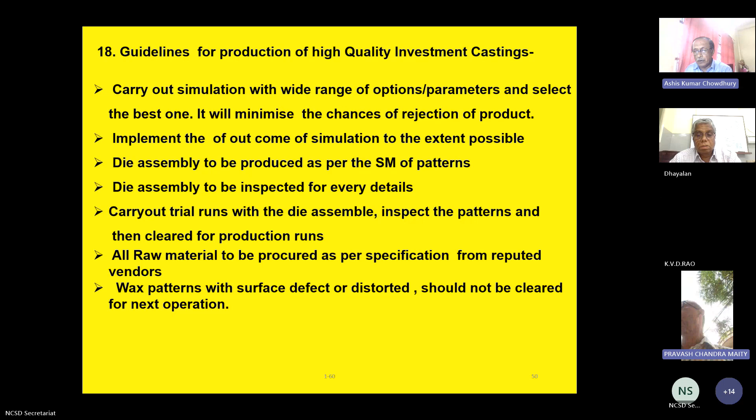Viscosity of ceramic slurry should be checked regularly with a Zahn cup. Wax patterns and pattern assemblies have to be stored in a controlled atmosphere. The surface of the wax pattern is to be cleaned with solvent to remove oil, grease, and dirt.

During ceramic coating of the wax assembly, sufficient time should be given to dry each layer of the ceramic coating. During burning of residual wax, slow heating of the ceramic shell is recommended. All furnaces are to be regularly calibrated.

At the time of pouring molten metal, the pouring basin of the shell mold is to be placed nearer to the spout of the furnace or nearer to the spout of the ladle.

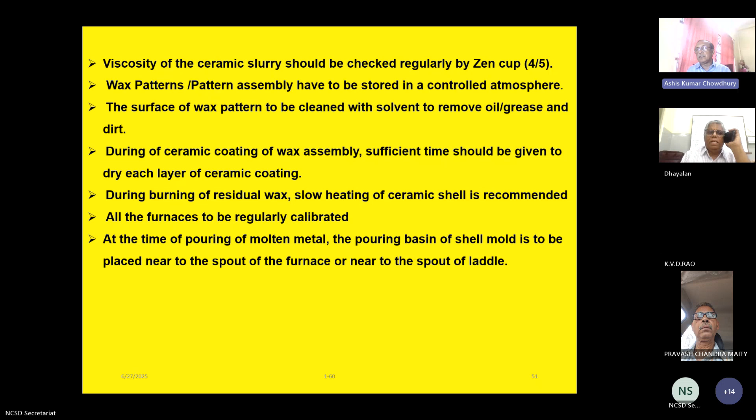Guidelines may be followed for making the pattern cluster. Gates should be placed on the heaviest sections. Ensure all isolated heavy sections have gates or feed paths.

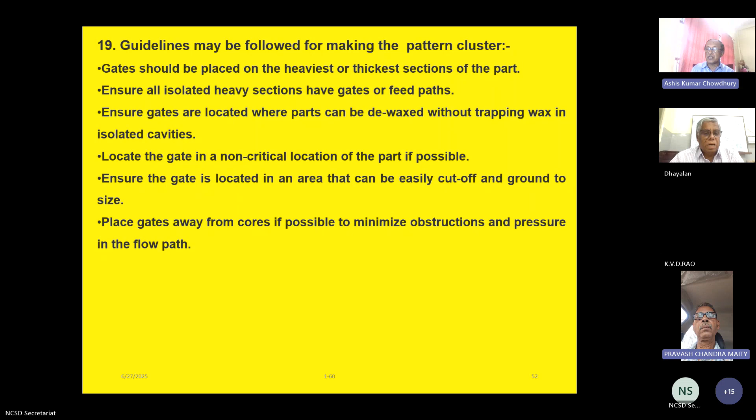Ensure gates are located where parts can be dewaxed without trapping wax in the isolated cavity. Locate the gates in a non-critical location of the part if possible. Ensure the gate is located in an area where it can be easily cut off and ground to size. Place gates away from the cores if possible to minimize obstruction and pressure in the flow path.

In conclusion, investment casting has withstood the test of time, proving its value across thousands of years. Indeed, it is still being developed to meet the demands of modern society. Even in the modern age, it remains a cost-effective, efficient, environmentally responsible method for producing precision metal components.

Industry has already implemented advanced tools like CAD, CAM, simulation software, automation, and robotics in the production line. These software tools not only reduce the development cycle but also give the opportunity to manufacture high quality castings at a competitive price, and help minimize the rejection rate of the product.